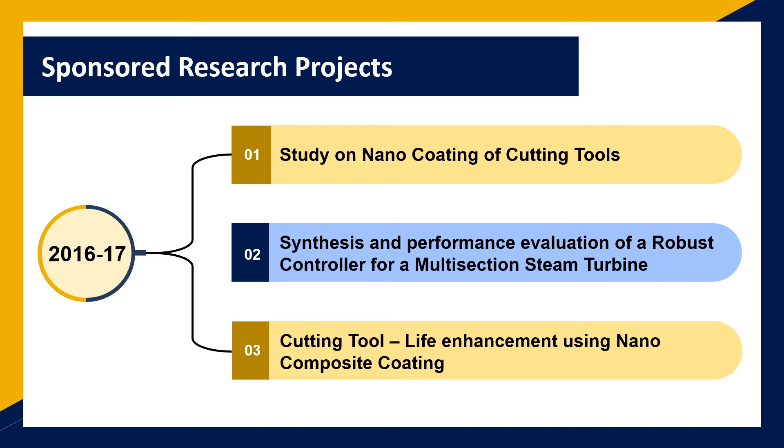So there are many programs on the SWAYAM portal, and here are some of the sponsored projects we are conducting. Some R&D projects, the MODROBS project of AICTE, and FDPs on digital learning with AICTE. We are also conducting international and national conferences. And here you can see how many research publications our faculty has.

We are also offering consultancy and extension services: Pradhan Mantri Kaushal Vikas Yojana, student skill development training, recruitment support. Many of the states are getting equipment support from NITTTR Chandigarh, and we have high tech labs. In our mechanical engineering lab, we have 3D printing also.

So here are some of the glimpses of mechanical engineering and training. We are conducting training programs in various fields. You can see on your screen. So here in electrical

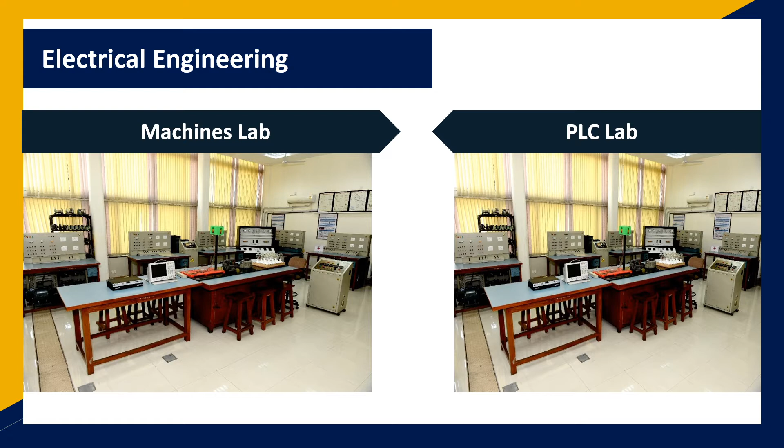So here, in the electrical engineering department, we are having various facilities. So you can have the glimpses of our labs. We are having very high-tech labs, and we are continuously updating our labs as per the requirement of the students. We are having PhD students, and many of them want some additional or upgraded equipment, so we are continuously purchasing those equipments as per the need. So in electrical engineering, we are having PLC, machines labs, and these are some of the programs which we are offering.

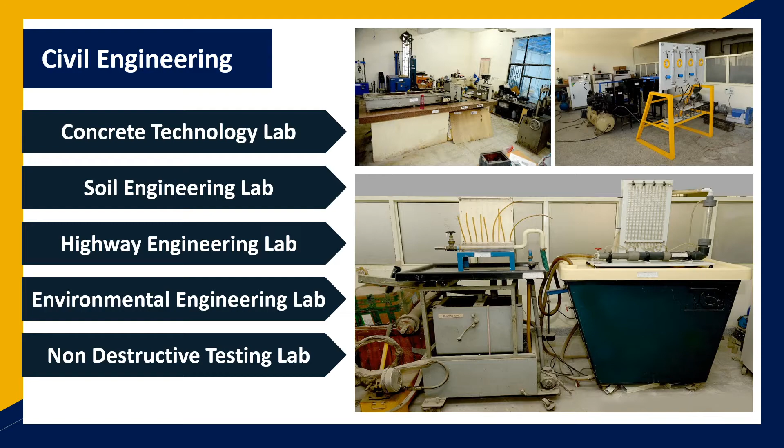So in the civil engineering program, as our head of the department told you, we are offering the MTech program in construction and technology, and we are having a concrete technology lab, soil lab, highway lab, environmental lab, and non-destructive testing lab. In all the labs, we are offering large consultancy to the states. We are having training programs in environment engineering, structural health monitoring, soil engineering, disaster management, smart city, and new generation concrete.

So this is the education and television center, in which we are developing video films not only for training purposes but also like lab manuals. If you want to show your students how to operate the equipment, we are developing those videos also, and all the videos are available on our website. So these are our facilities.

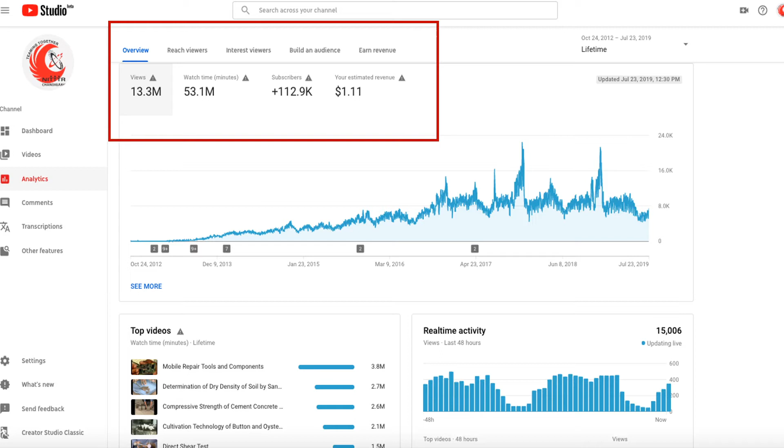So here I would like to start my presentation, this one-week short-term program on advanced construction technology. My name is Dr. Amit Goel, and basically I am a civil engineer. My specialization is in structures, and I did my PhD in earthquake engineering from the Indian Institute of Technology, Roorkee. So now I'm going to take this session on seismic resistant advanced construction practices, especially for masonry structures, because this is my specialized area, and I did my research in this area.

So in this whole presentation, I would like to explain the present scenario of masonry construction, what other parts of the world are doing, and how you can make earthquake resistant masonry structures. We have developed one very innovative technology, for which we have applied for a patent also, so I will definitely explain that technology. My MTech and PhD students are also working on some innovative technologies, because we are a developing country, and we need affordable technology as far as seismic resistant structures are concerned.

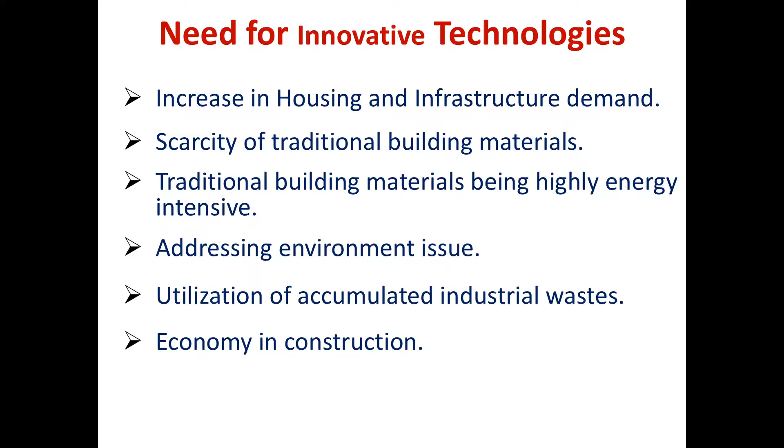And what are the effects of climate change? We are having fires, we are having droughts, we are having floods, we are having cyclones, we are having earthquakes at different intervals of time.

If you remember, when any earthquake engineer or scientist is asked, can we predict earthquakes, he will reply that if we are experiencing small earthquakes at different intervals of time, a big earthquake can hit that particular region at any time. So that is how we predict earthquakes, and nowadays we are experiencing small earthquakes at different intervals of time. This is the warning that we should be aware of this climatic change, as well as this deadly disaster called earthquake.

So what is the impact of this climate change on the housing sector? Now I'd like to throw some light on the effect of climate change on the housing sector. If we talk about climate change, now we are having prolonged winters as well as prolonged summers. Suppose you are residing in some hilly areas, but nowadays in hilly areas we are experiencing summers. So now we need houses that can handle the summer situation as well as the cold climate condition.

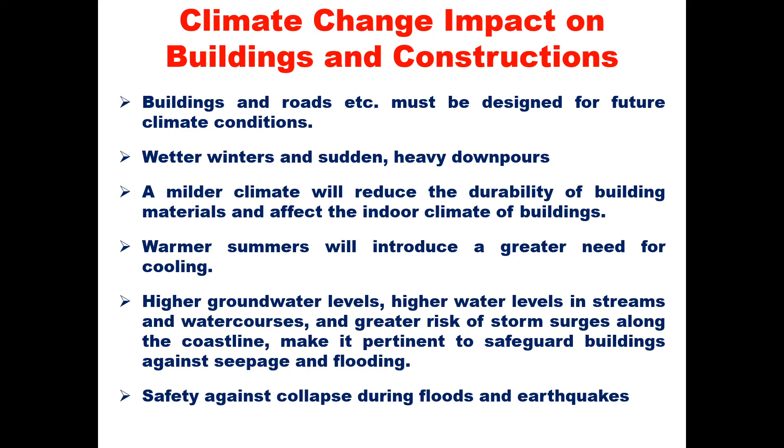So if you will talk about earthquakes, now I am going to tell you about the main construction practices as well as the new construction practices which can be followed, and what are the innovations in the field of masonry construction.

So here first you need to understand the earthquake. Many misconceptions are there by this term earthquake. Many of us term it as if the earth will shake, that is called an earthquake. Now we need to understand why the earth will shake. It shakes because of release of large amounts of energy during that activity. These earthquakes are caused by movement of tectonic plates, called natural earthquakes, as well as man-made earthquakes. But in any earthquake, a large amount of energy is released, and this energy travels below the earth's surface in the form of waves, and these waves will enter into your building, and your building will move accordingly.

I will not go much into detail into earthquake engineering, what is the magnitude, and I hope you all know about these terms, and I would like to move further, because if you want a lecture on earthquake engineering, that is available on our NPTEL website of NITTTR Chandigarh, you can refer to that lecture also.

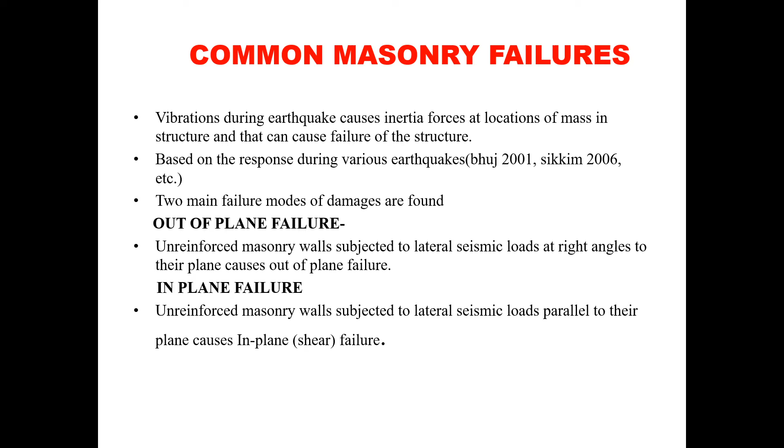Now suppose the direction of the force is perpendicular to your wall, so that wall will have the out of plane action, right? If the direction of the earthquake is parallel to that wall, that wall will be in plane direction. So we'll understand by this sketch what is in plane and out of plane in a masonry structure.

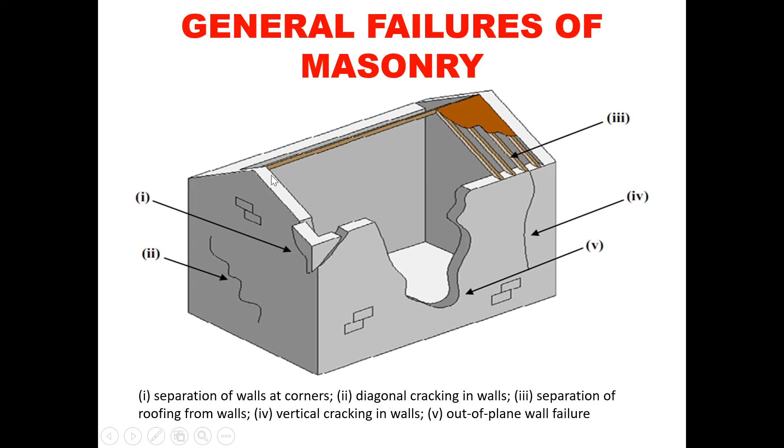So before that, these are some of the common failures which we are experiencing in masonry structures. This is out of plane failure, this is corner failures. We are separating the roofs, some cracks will be there. So these are the common failure practices of masonry structures. So here, if you see what is the out of plane failure, you can see how

You are kindly requested to switch off your mic, switch off your mic.

So this is the out of plane failure. You can see how the out of plane failure will be there. So if the earthquake load is in this direction, because earthquake force will create inertia force in your building, in your wall, right? So this is the out of plane movement of the wall, and this is the weakest direction of any masonry construction, that is out of plane failure, right?

So here you will see the in plane failure of the wall when the direction of the earthquake force is in the in plane direction. Now here I would like to throw some light on the load bearing structure as well as the framed structure. In load bearing structures, the load is borne by the walls, right? But in framed structures, the load is borne by the beams and columns, right?

Whenever the structural engineer designs any framed structure, they design the frame, right? And in the joints they are developing the hinges in a uniform way so that the structure can move. But we have designed the frame, and we are putting rigid infill walls inside the frames. Now suppose this is the frame and you have provided the rigid wall within your framed structure.

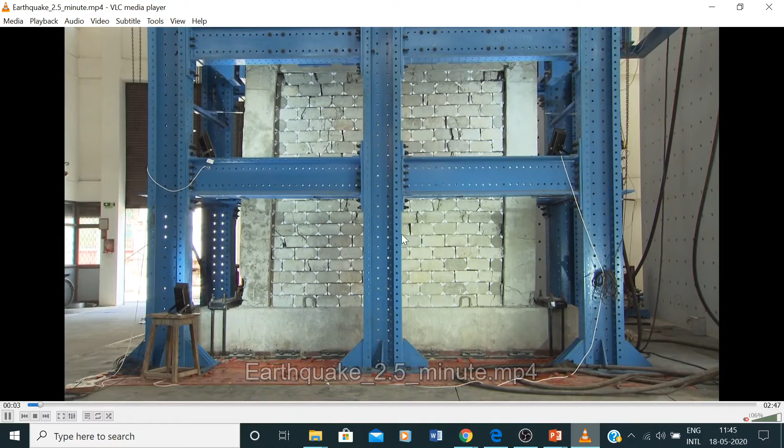So for the understanding of all the participants, I'll show small videos of how the frame structure moves during testing. So here you can see the movement of the wall, you can see the movement of the frame, right? These are the structures which we have tested with this technology. Here you can see the frame is moving, and this wall needs to move with the frame. Now this wall is moving with the frame, right? That's why this wall is not having diagonal tension cracks.

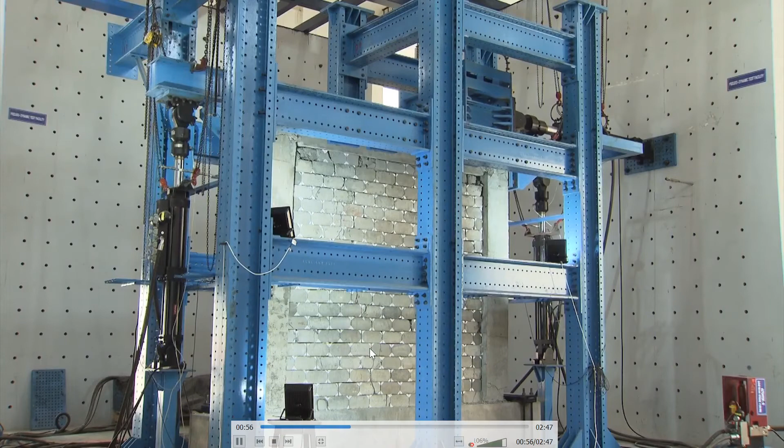Suppose this wall is rigid, right? Now your frame is moving but your wall is not moving, and it will create extra shear force on these beam column joints, and it will destroy your beam column joints, from here, from here, from here. That is why researchers are doing research on strengthening the beam column joint. So this is the other way your frame moves. You can see how your frame is moving.

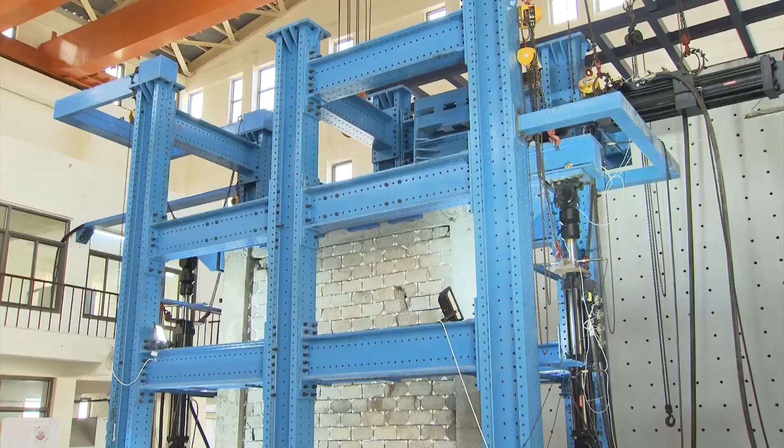So I'll show you in some fast direction. Because this is the pseudodynamics lab, and in this pseudodynamics lab we used to move the frame at a very slow pace to see what is happening in the structure. So this is the video; we have accelerated that video. That is why you can see the movement of the frame, right?

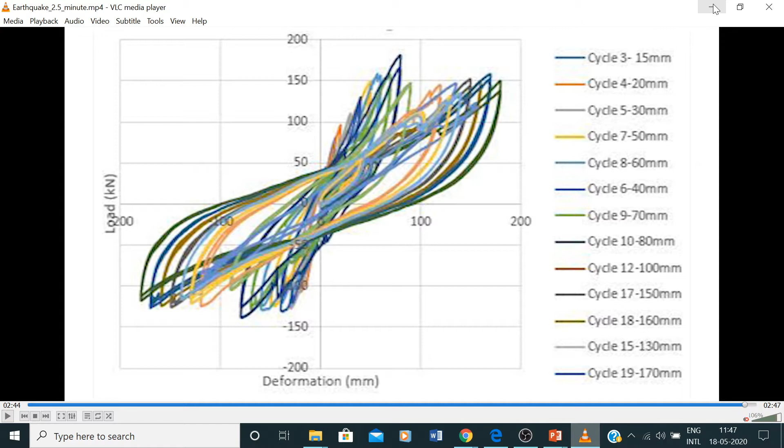So here you can see the movement of the frame, how the frame is moving, right? So I think you have seen how this frame is moving. And we are having this graph of cyclic loading. So here again I'll come to my presentation.

Now if you see, we have experienced many devastating earthquakes. In 2001, the Bhuj earthquake of magnitude 7.7, right? So as far as earthquake engineers are concerned, we measure the earthquake in terms of acceleration, how much acceleration this particular earthquake has produced, which has entered into our buildings, right? So in the Bhuj earthquake, the acceleration was 0.1 g.

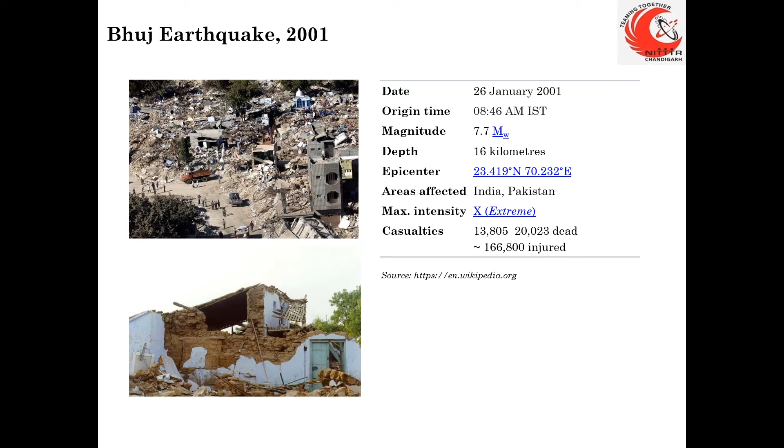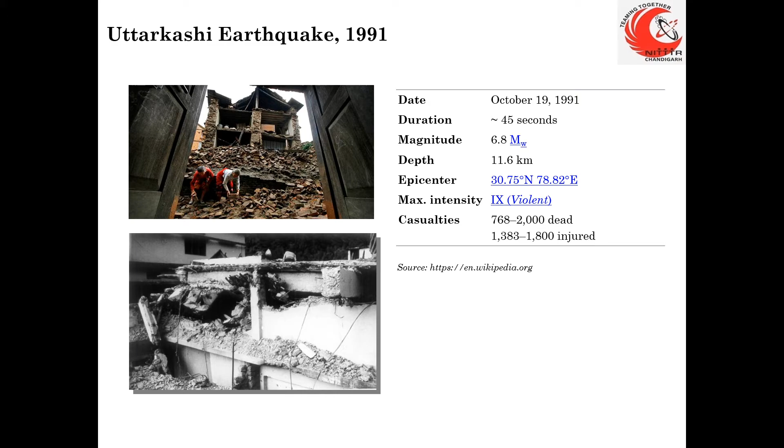And we have experienced the Chamoli earthquake, Latur earthquake, Uttarkashi earthquake. So you all know about these earthquakes. So from all these earthquakes, the lesson our engineers have learned is that if you want to have earthquake resistant structures, you need to provide the basic bands. I will not go into the details of these bands, but I would like to throw some light that these bands are very essential in case of any masonry structures.

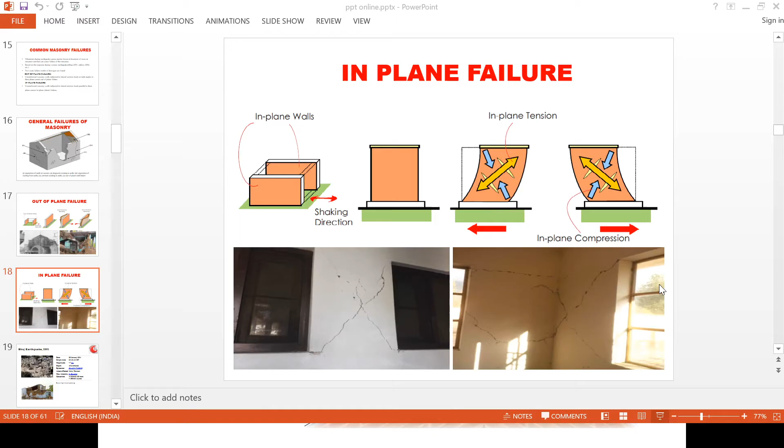In the codal practice, our buildings have been divided into different categories: category A, category B, category C, category D, category E, and according to that, the number of stories and the strengthening to be provided to all stories. So if you see the Indian Standard Code, if you are having 1 to 3 stories or 4 stories, you need to provide situations A, B, and C, or A, B, C, F, G. So these are the provisions which you need to take care of while designing masonry structures. You may need to provide 4 bars in the bands.

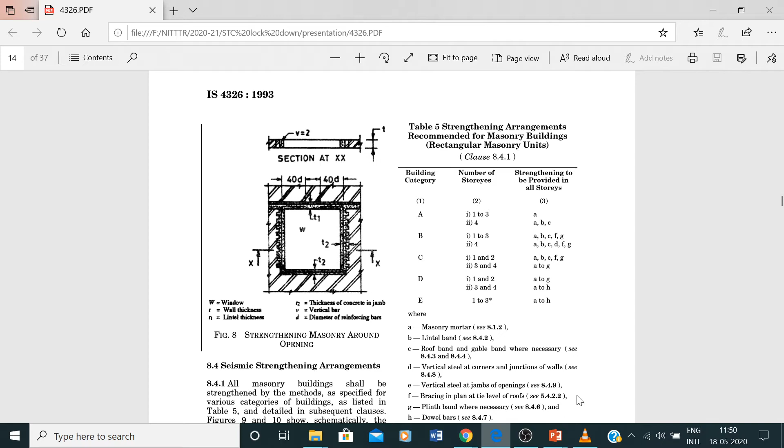It is not like you always need to provide 2 bars, right? You may need to provide 4 bars, or 2 bars. That depends upon the length and size of the building as well as the category of the building, right? So here you need to provide the bands, and for testing those earthquake bands, here I am showing you the shock table test. This is the shock table testing facility, and in this shock table, this is the impact type of loading which we are providing.

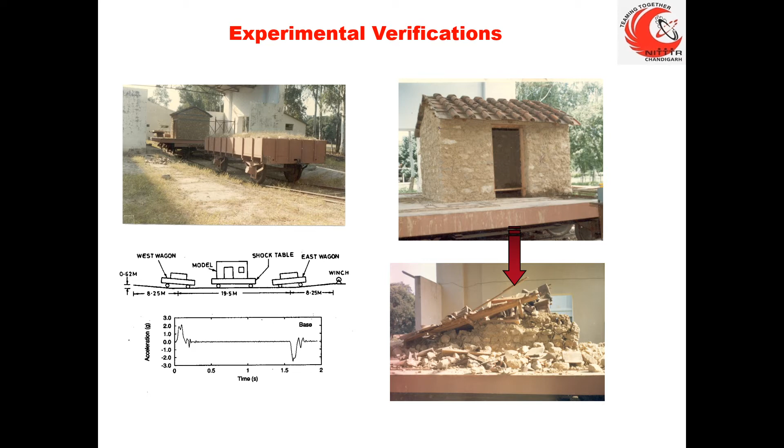In this impact type of loading, the impact is very high, but the duration is very low. But in an earthquake, the duration is large. You can experience the earthquake up to 20, 30, 40 seconds, right? So in this test, the duration of the shock is very less. That is why we call it impact type of loading. So you can see here the structure which is not having any band has totally collapsed, whereas the structure having bands, lintel band, plinth band, is saved from the horizontal loading. What is the reason, how are these bands saving the structure?

What is the reason that these bands are saving the structure? These bands are working in two ways. First, they are reducing the unsupported length of a structure. You can well imagine, if the unsupported length of any structure is high, it is very weak in case of bending, right? Here we have reduced the unsupported length.

At the same time, we have joined all the parts of our building with this band. So our building will act monolithically. When the horizontal loading will be there, all the parts of the building will join together and they will help each other, right? So this is called integrity. So this is how these bands are very important in case of any building structures.

So here are some of the principles of earthquake resistant construction which we are following nowadays, right? So these are the practices which we are following. The first is the principle of integrity; the bands we have provided, that is called the principle of integrity, right? As well as you need to tie the corners. That is most important. You need to tie the corners.

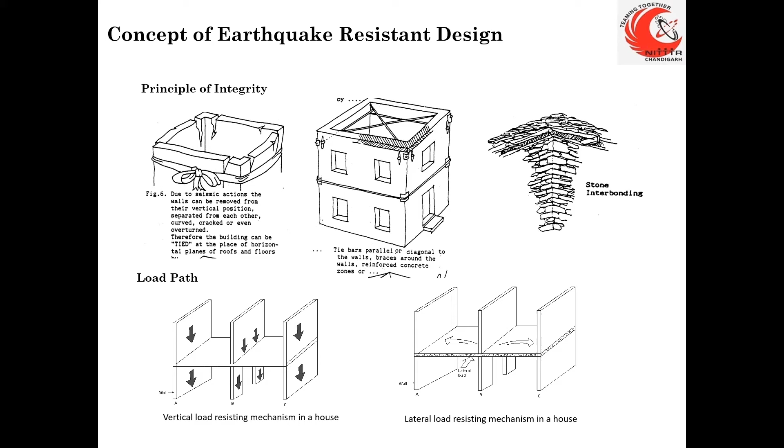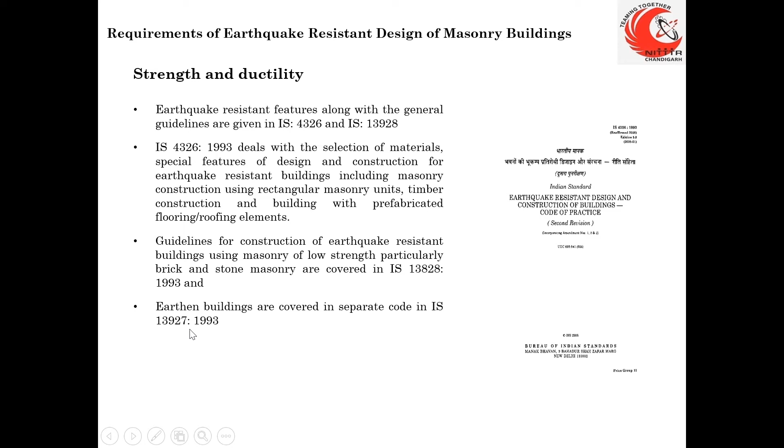So here we have some of the Indian standard codes. I will not go into the details of these codes, because I need to explain some of the innovative technology in masonry construction, since this program is on advanced construction technology. But we have these codes which we need to take care of for masonry structures: IS 13928, IS 4326, IS 13927. These are the codes which we need to take care of for masonry structures.

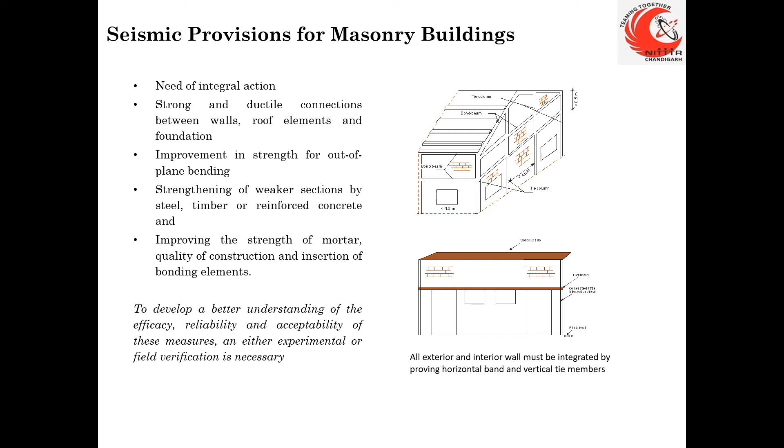So now, as I already told you, the provisions in masonry structures should improve the out of plane bending, right? It should improve in plane bending. We need to take care of weak parts, we need to take care of corners. So these all we need to take care of when we are designing any masonry structure. Here I will talk in both directions, for load bearing as well as for framed structures, right?

So what are the limitations of these earthquake resistant provisions? These are the practices we are offering to masonry buildings, based upon ductility, right? We are improving the ductility of a structure. Now, masonry structures have different components: your blocks, your joints, your openings, your doors, your windows. So there are different components in your masonry structures, right?

So the phenomenon of ductility has very limited efficiency. Second, in masonry structures, it is very, very difficult to achieve complete ductility in each and every part of the construction, right? If you talk about the Nepal earthquake, many masonry structures collapsed. These masonry structures are very strong in compression, but very, very weak as far as cyclic loading is concerned. What do you mean by cyclic loading?

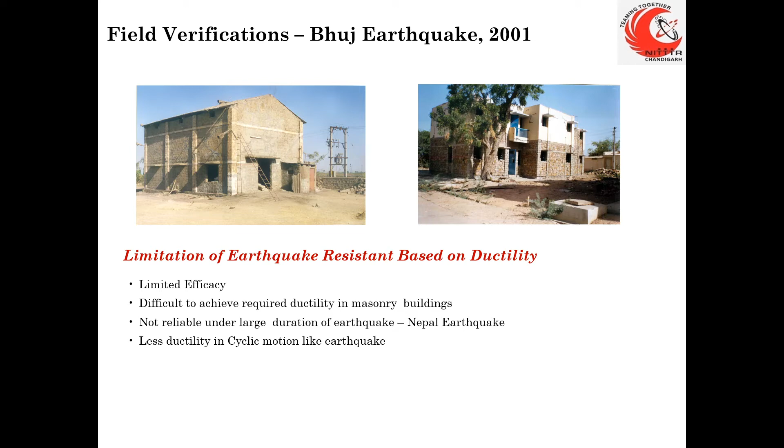Many people do not understand cyclic motion. Whenever I ask my MTech and PhD students what cyclic loading is: in cyclic loading, you are applying the load and removing the load in both directions, positive and negative. That is called cyclic loading. You are providing cycles of loading; you are loading it, you are removing the loads. So these masonry structures are very weak in case of cyclic loading, right? So what are the alternative mechanisms?

If this ductility phenomenon is not proving very good in case of masonry structures, what are the other phenomena we can take? The concept of damping. If the earthquake energy is damped, it will not transfer to your building, it will not transfer to the length of your building, and then your building will be saved.

To understand the concept of damping, I will take two examples: one is a very nominal normal car, and one is a Mercedes. What is the difference between them? When you are riding a normal car, you will experience shocks, because the damper of that car is not that efficient. But if you drive a very good car like a Mercedes or an Audi, the damping capability of that car is very good. You will not experience any shock while driving that car.

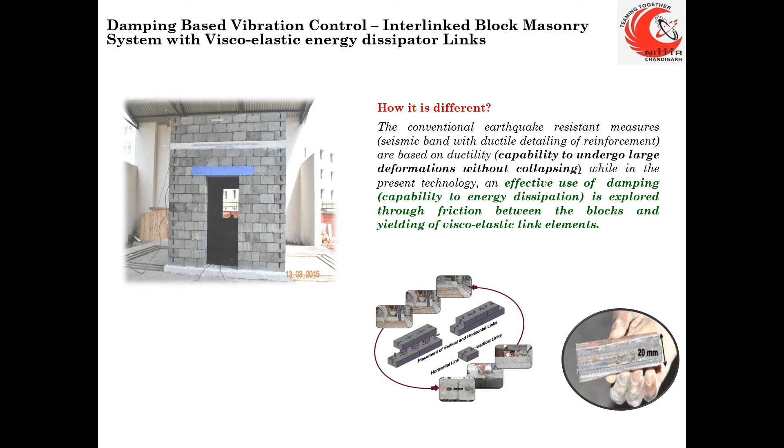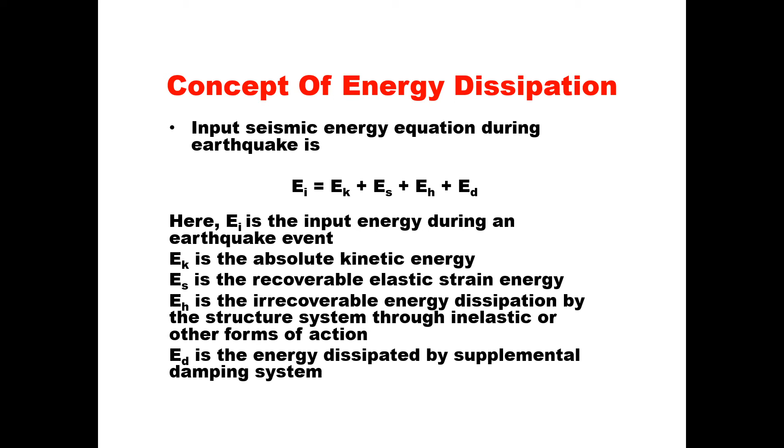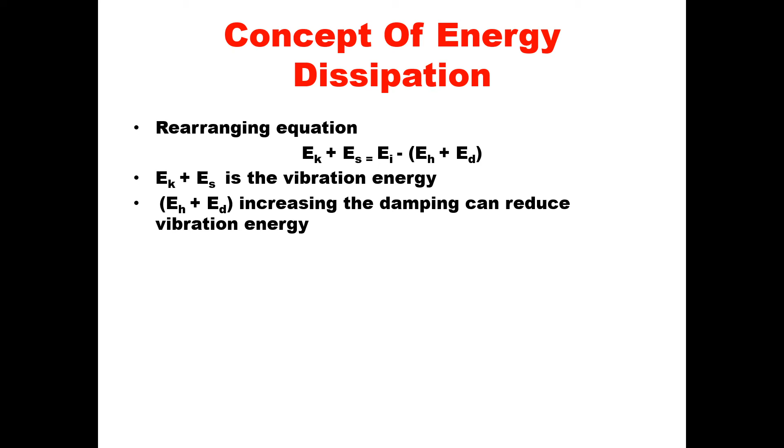So what is the purpose of these supplemental devices, right? You will hear about dampers, base isolation systems; there are many big terms related to the damping of the energy. So what is the purpose of these supplemental damper devices? First, your building should be designed to take seismic loads, horizontal forces. Another thing, the energy should be dissipated or absorbed by that device. Third thing, your load bearing components should bear only the gravity load, not the horizontal loads.

You need to reduce the horizontal loading because your structures are very strong in compression, but they are very weak in horizontal forces. So scientists are very clever. They are reducing the horizontal energy by introducing these devices. Another thing, limit the damage.

One thing you should remember, any energy will be dissipated in a conventional way by damaging anything. Your structure will experience damage. That is how it will dissipate energy.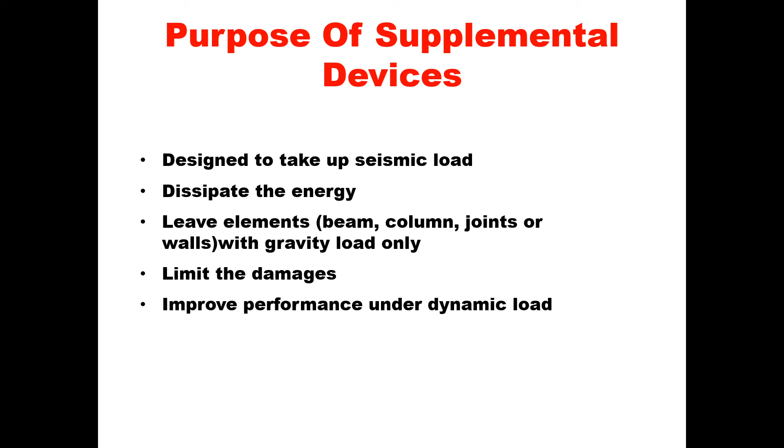But if you introduce these devices, the devices will be damaged, but your structure will be saved. So it limits the damages and also improves the performance of your structure under dynamic loading. Dynamic loading means you are experiencing compressive force, horizontal force, rotation at the same time. That is called dynamic loading, where each degree of freedom of your structure is moving.

If you classify energy dissipation systems, there are active damper systems, passive damper systems, and hybrid systems. Hybrid system is a combination of both active and passive.

Here I'll talk about the passive damping system. Passive damping system means tuned damper, and tuned dampers are further classified as tuned mass dampers and tuned liquid dampers. Passive dampers are also classified as base isolation technology and energy dissipators.

Under energy dissipators we have viscoelastic damper, viscous damper, yielding damper, and frictional damper. By their names you can understand: viscous damper has viscous properties, viscoelastic means viscous as well as elastic, yielding damper means the damper will yield, and frictional damper means the energy will be dissipated by friction between the dampers.

So these are the energy dissipation systems. In active dampers, if you talk about it, active dampers need external power and sensors. Researchers are doing more research on passive dampers.

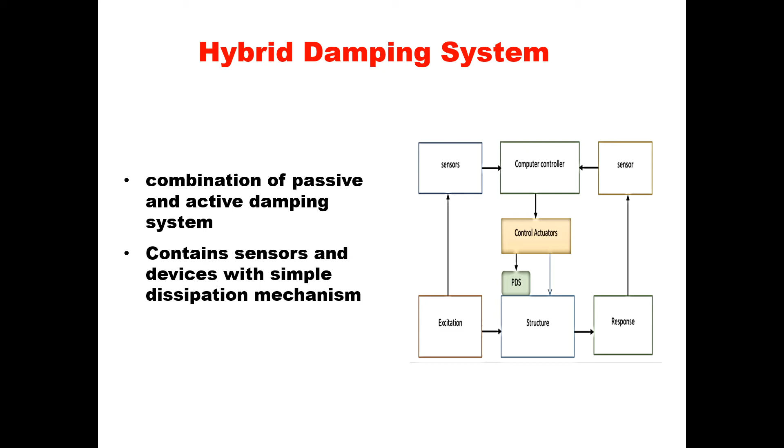In hybrid dampers, that is a combination of both active and passive damper. Your passive system is there, which is attached to actuators and sensors. When excitation occurs, all the sensors will be activated, and accordingly your damper will work.

Now I would like to talk about dampers from here. Two of my students are working on this - one student is working on a frictional damper. We have developed a frictional damper for framed structures. In a beam column joint, the damper will be installed. That is a very affordable damper - the cost is around 300 to 400 rupees only.

So testing is going on. I cannot show that picture to you because we are going to apply for a patent for that damper. That is the research work of my student. I cannot show you, but the technology is that in each beam column joint we are going to introduce a damper, so that when the structure moves, that damper will take all the energy and dissipate it by friction.

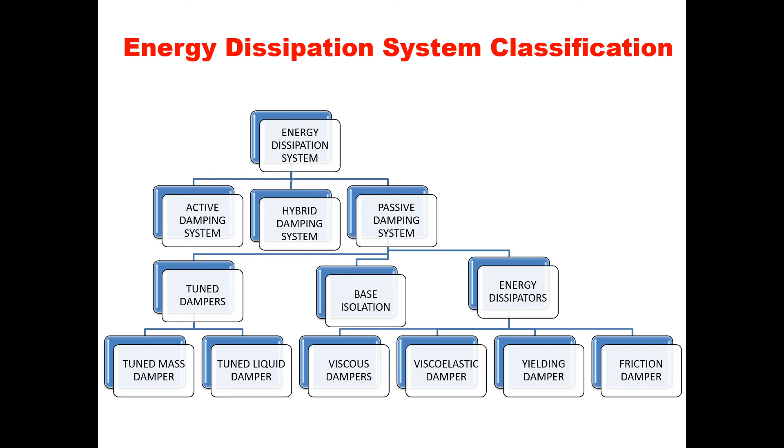Another damper is the viscoelastic damper - a similar kind of damper, but we have changed the material and the mechanism a little bit. That is the viscoelastic damper which we have developed, but testing has not been done yet. But for the frictional damper, we have done the testing, and soon you will see that damper in the market.

Whenever you are developing any technology, please keep in mind that the technology should be very simple. It should be understood by a common man. You should not introduce a tedious kind of technological complexity into your devices, so that your technology remains applicable to the market.

For joining these masonry structures, you need not apply any mortar, because in masonry structures these joints are the problem-creating elements - they are very weak in case of horizontal loading. Now we have eliminated this cement joint between the blocks. We have introduced an interlinking element instead.

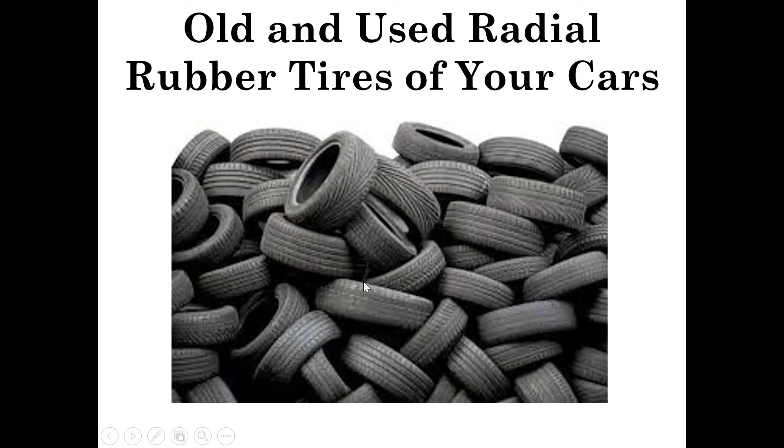These two links, if you see the block, the vertical links have been prepared for taking translation, and the horizontal links are prepared to take rotation. So we have taken care of both translation and rotation.

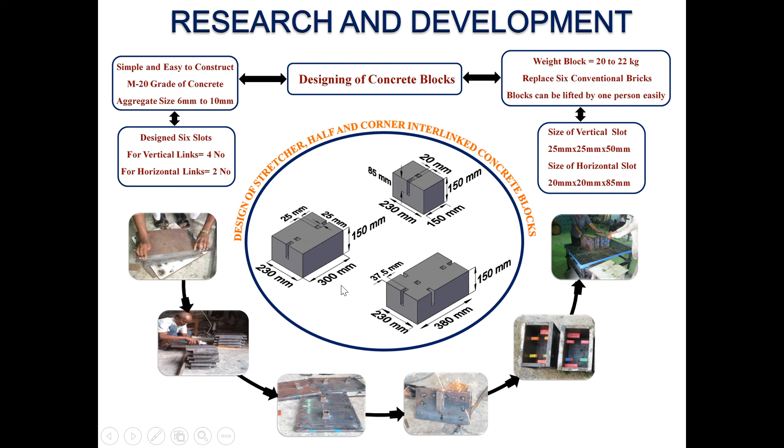We have taken care of both actions of masonry. These are the components we have introduced in the block masonry system, and we have tested this technology extensively on shake table and shock table, as well as the quasi-static testing facility of IIT Roorkee.

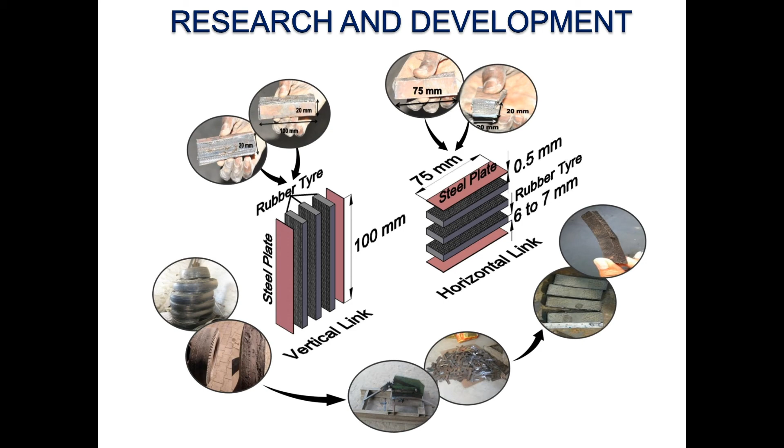I would like to show you a small video film of 5 to 6 minutes duration. This technology has been selected in Make in India, and we created this video film for our honorable Prime Minister. I would like to show you that film so that everybody can understand this technology.

Earthquake. Earthquake is a natural phenomenon and cannot be stopped. Thousands of people lose their lives during earthquakes.

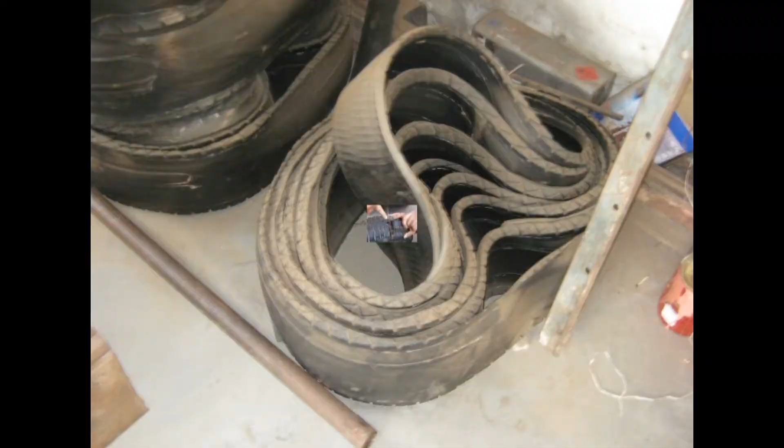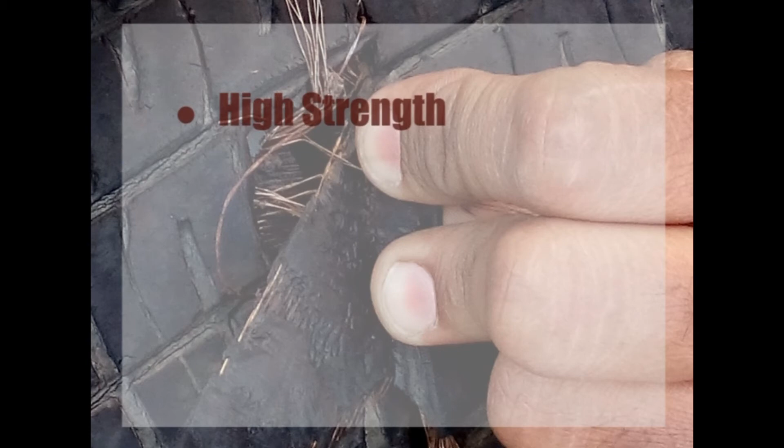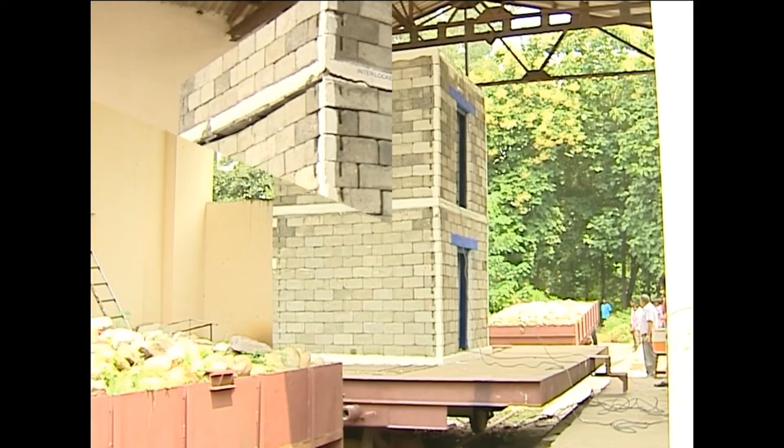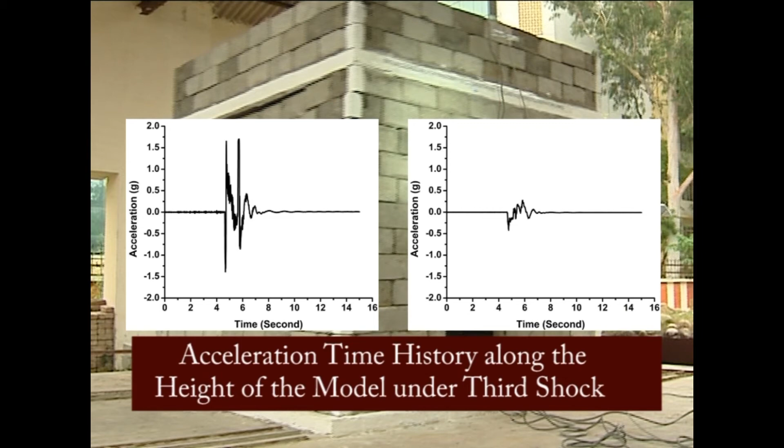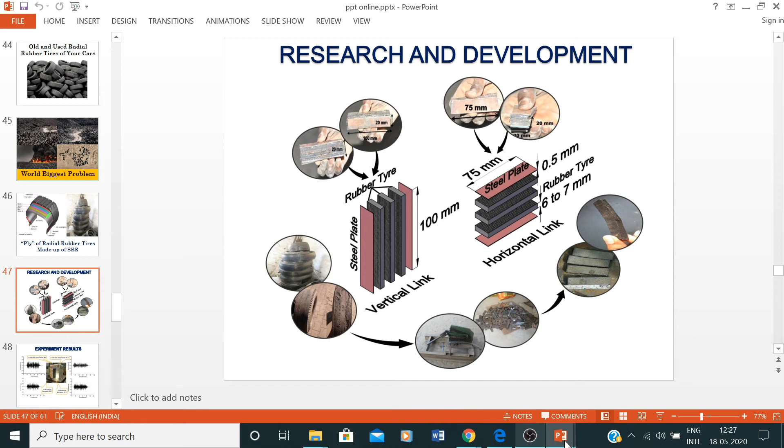So this was the technology, a small video film developed by us. In this technology, I talked about the natural frequency of the structure, and when we tested it, you can see the natural frequency of the structure is 9.37, and 6.25.

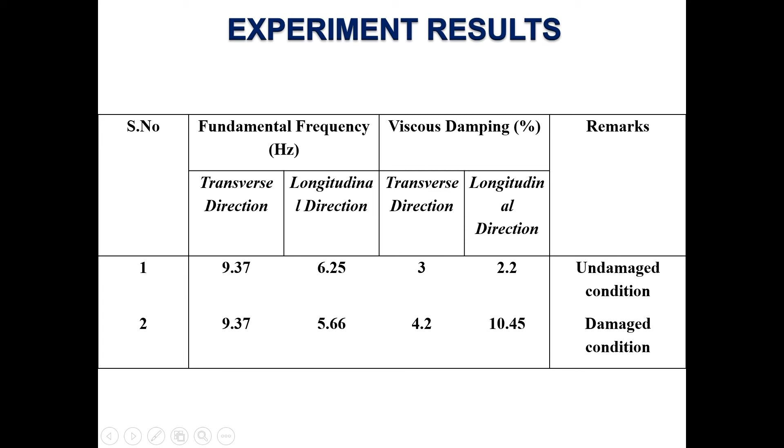When we compared this earthquake energy during testing on the shock table facility, we created the transfer function showing how the energy has been created and how it has been dissipated.

You can see here that the acceleration is around 1.5 g, and here at the roof level we are getting very minimal acceleration. So you can well imagine that when your structure is joined only with viscoelastic links, and not with any mortar, it can perform very well. It can dissipate energy up to a maximum extent.

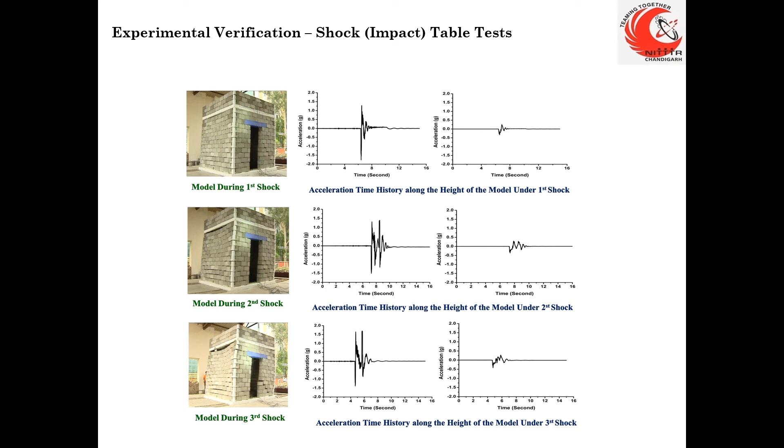Here I would like to show you the picturization by the high speed camera, because whenever we are doing any testing, the test happens at a very fast rate and we cannot see the movement of the blocks. So we have installed a high speed camera capturing around 1000 frames per second, meaning in 1 second the camera takes 1000 pictures.

If you see the high speed camera footage, you can see that the joints have opened around 100 mm during that shock, and after the shock the joint has completely closed after dissipating the energy. If you imagine a masonry structure, if the joint opens 100 mm, the building will collapse. But here it returns to its original position.

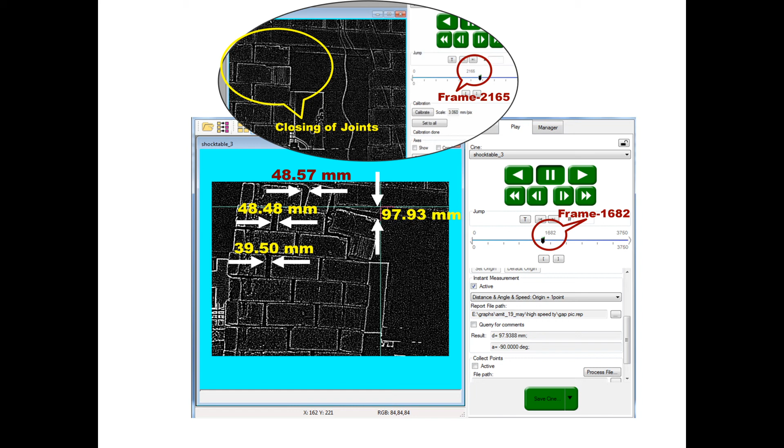So this is the picture taken by the high speed camera. You can well see that using a high speed camera, you can see very minutely the structural performance during any testing.

This technology is having many advantages, because it is a very fast construction, and we have reduced the cost of construction by 30% in the lab. If this technology enters the market, and competition between technologies increases, the cost of construction will further reduce.

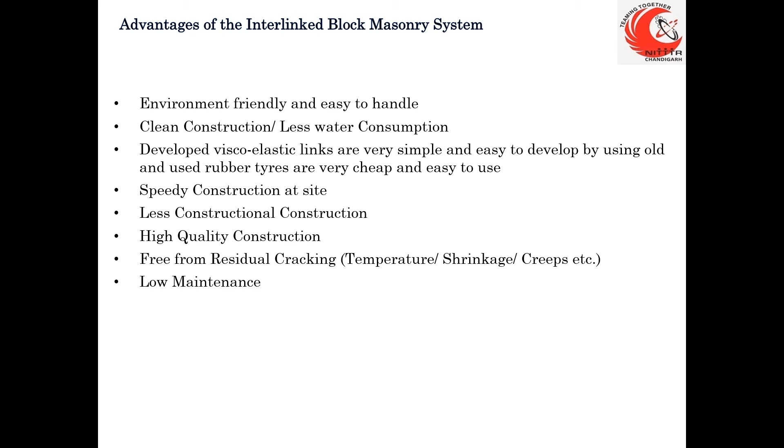We are facing some challenges. Earlier we were facing challenges for construction of these blocks, making of the viscoelastic links, and awareness about the technology. At this time we have successfully eliminated these challenges up to a certain extent. We have built the interlinked block making machine.

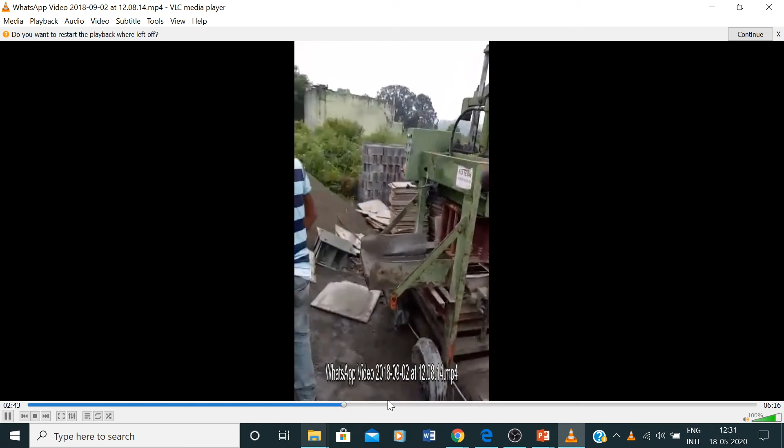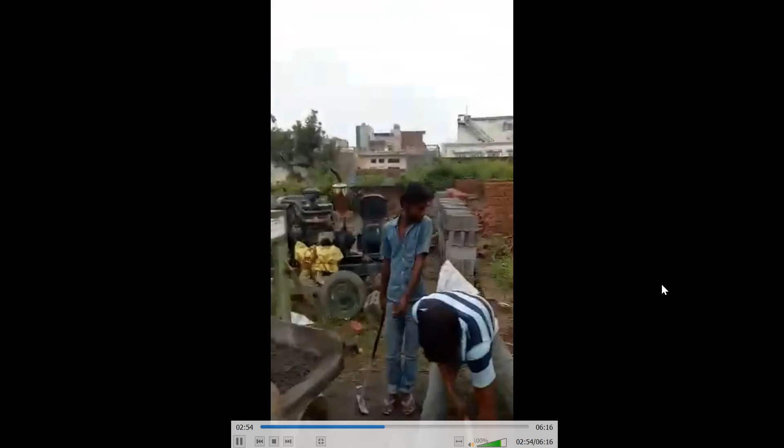Here I would like to show you the interlinked block making machine. This is one of the vendors who allowed me to make some changes in his old machine. So we have made some changes in the old machine. You can see that it was an egg laying machine, which we have converted.

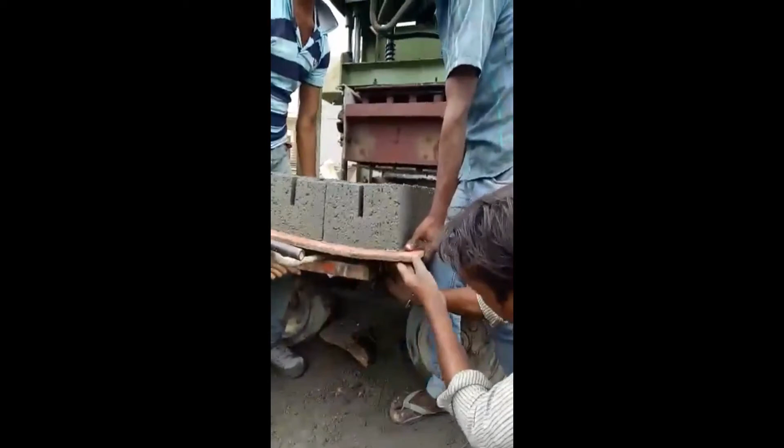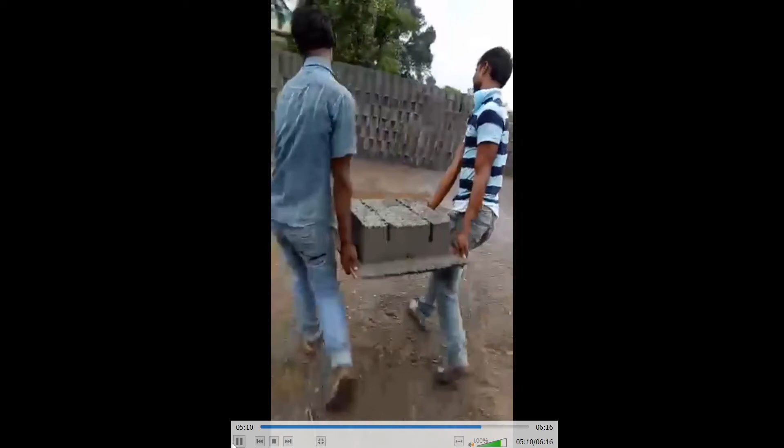So this is how we have developed this block making machine. For making a house of 1000 square feet, we need 8000 blocks. This small machine which we have developed can make 500 blocks in a day, and a bigger machine can make 2000 blocks in a day.

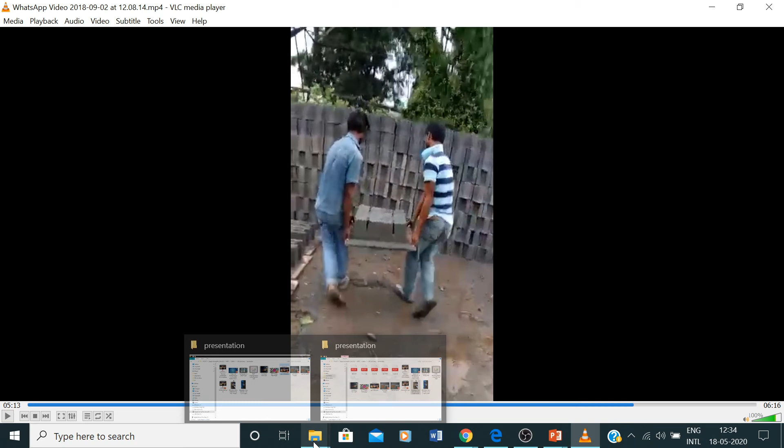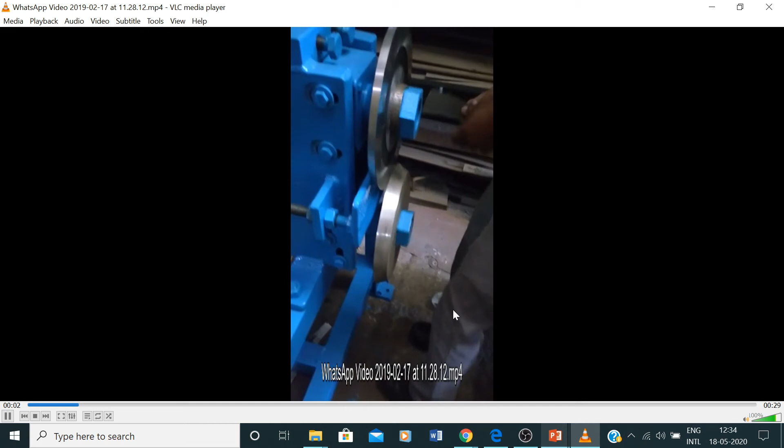We have also developed one machine for cutting the rubber tires. So for cutting the rubber tires, we have already made this machine. This is the machine which we have developed for cutting the tires.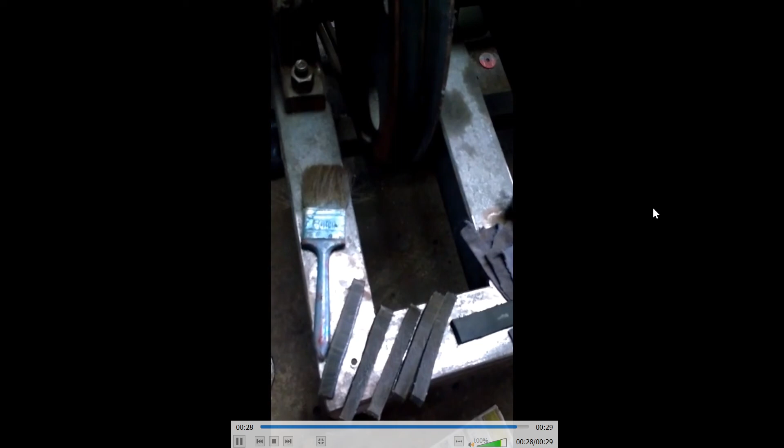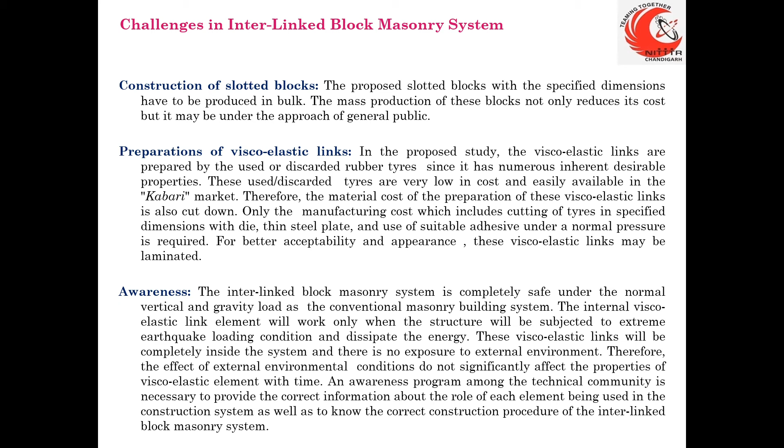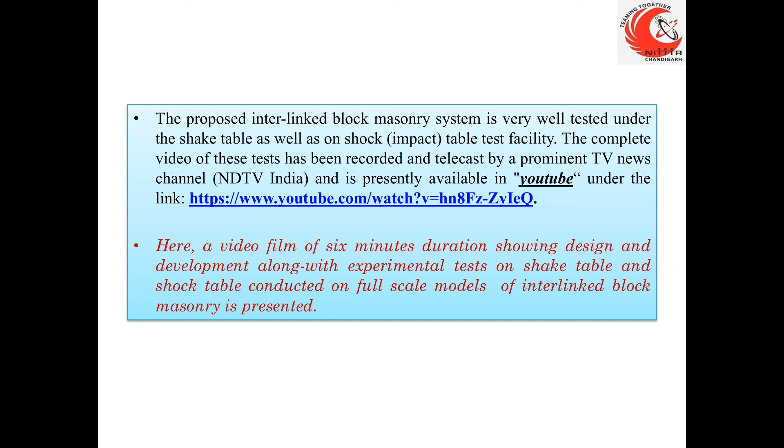So this is what we have developed, and we have tried to transfer this technology to the masses, so that our countrymen can save their lives during earthquakes. You can see that video on YouTube. If you type on YouTube 'IIT Roorkee earthquake', you will see one movie. The technology has been covered by NDTV, and we have also shown this short video film. This is also available on the IIT Roorkee website, so you can watch that video film from there.